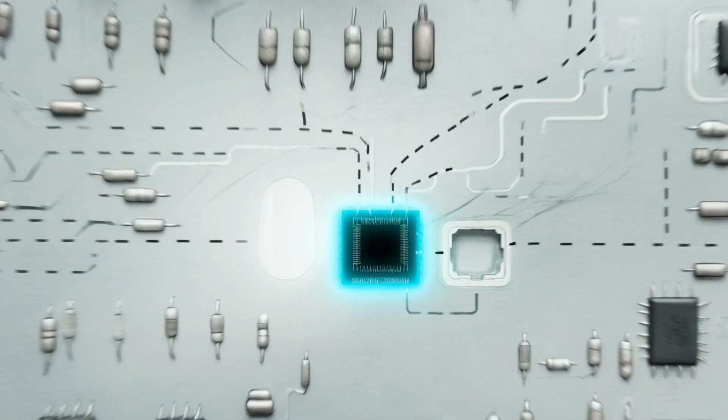Row upon row of gleaming steel and glass stretched toward the horizon, baking silently beneath the midday sun in vast parking lots across continents. Thousands of brand-new motorcars sat idle, their engines primed and ready, yet their intricate electronic systems lay paralyzed by the absence of a single sliver of silicon no larger than a fingernail.

This humble window control chip, or perhaps a more critical power management component, represented the fragile thread connecting modern mobility to the invisible world of semiconductors. The scene evoked a profound sense of vulnerability, a quiet reminder of how the pulse of global industry could falter when the microscopic heartbeat of technology skipped a beat.

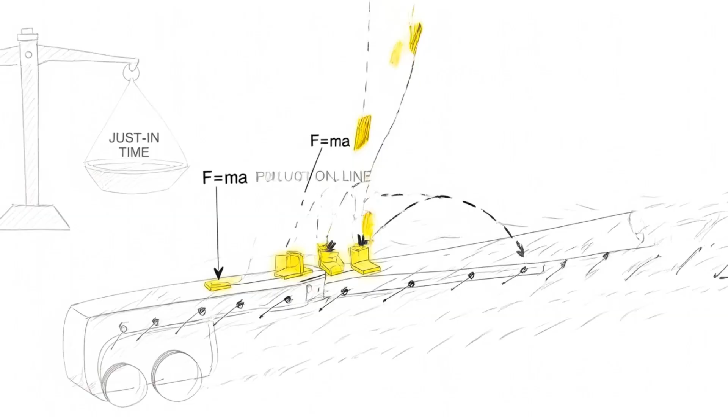For decades, the automotive sector had embraced the philosophy of just-in-time logistics, a delicate balancing act that minimized inventory costs but left no margin for disruption. When the global pandemic struck in early 2020, it triggered a cascade of events that shattered this fragile equilibrium.

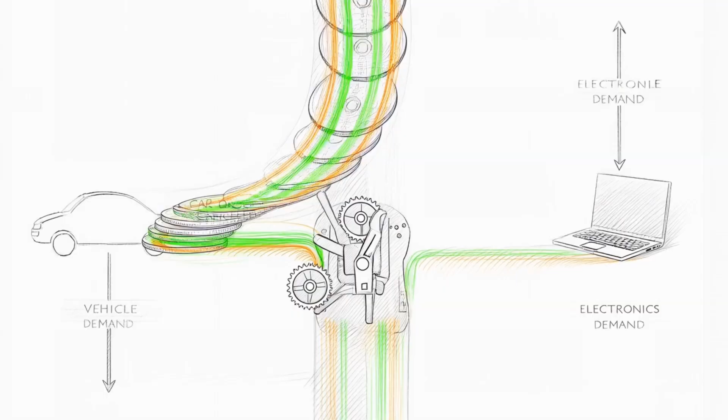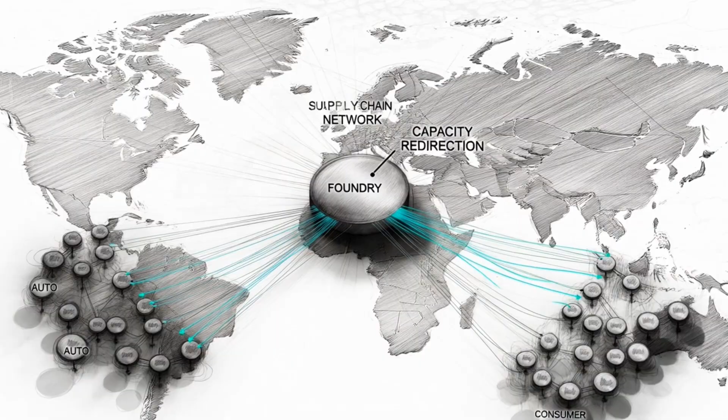Demand for vehicles plummeted initially, prompting manufacturers to cancel chip orders, only for consumer electronics like laptops and gaming consoles to surge as people shifted to remote work and entertainment. Foundries redirected capacity away from automotive needs, exposing a terrifying truth: the modern world had become tethered to an intricate supply chain it understood only superficially, one capable of halting production lines and inflating prices worldwide.

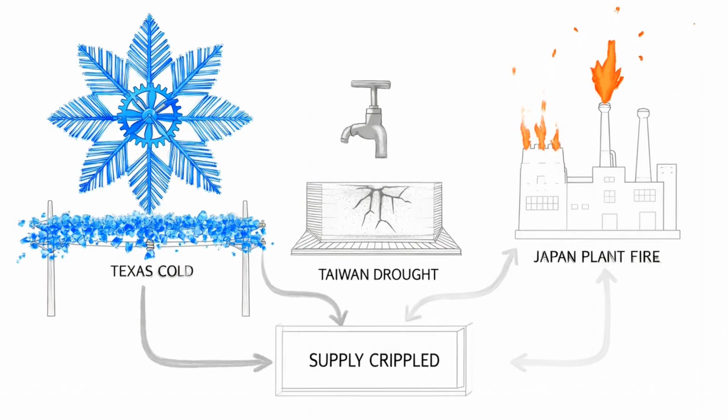The crisis extended far beyond a single event, amplified by additional shocks that tested the resilience of human ingenuity. Unseasonably cold weather in Texas disrupted energy supplies to fabs, a severe drought in Taiwan strained water resources essential for manufacturing, an earthquake and subsequent fire in Japan damaged key suppliers, and geopolitical tensions, including the conflict in Ukraine, interrupted the flow of specialized gases like neon critical for laser operations in chip production.

These factors converged into what industry leaders described as a perfect storm, resulting in over 11 million fewer vehicles produced globally between 2021 and 2023, with estimated revenue losses exceeding $210 billion for the automotive sector alone.

Factories idled, dealerships emptied, and consumers faced longer wait times and higher prices, yet amid this hardship emerged a deeper appreciation for the unsung heroes of progress, the engineers and scientists laboring in sterile environments to restore the flow of innovation. This period of scarcity highlighted not only fragility but also the potential for renewal, as governments worldwide responded with initiatives like the United States CHIPS Act, channeling billions into domestic manufacturing to build more robust supply chains and reduce dependence on concentrated production hubs.

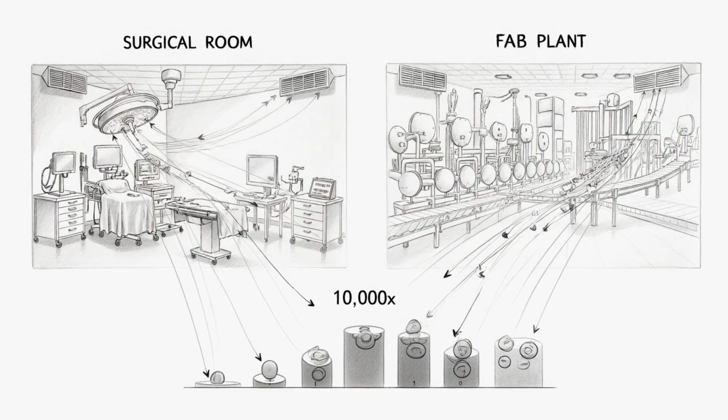Imagine stepping into a semiconductor fabrication plant, where the air undergoes filtration 10,000 times stricter than in a surgical operating room. A single rogue speck of dust could devastate an entire wafer, akin to a meteorite striking a bustling city. Here, in these cathedrals of precision, dedicated teams of engineers and technicians work in specialized suits, their movements deliberate and measured, surrounded by the low hum of machinery and the faint scent of purified chemicals.

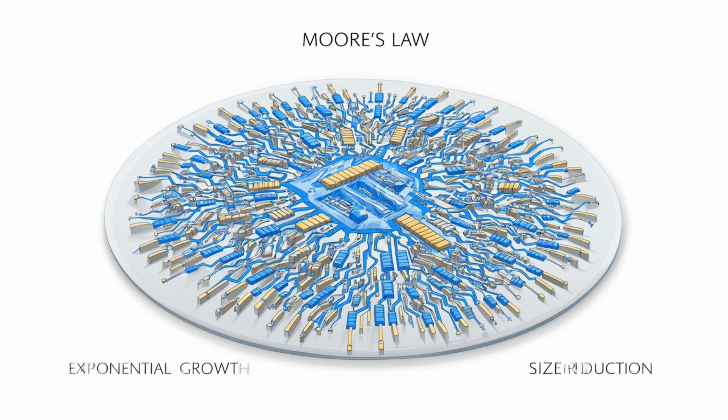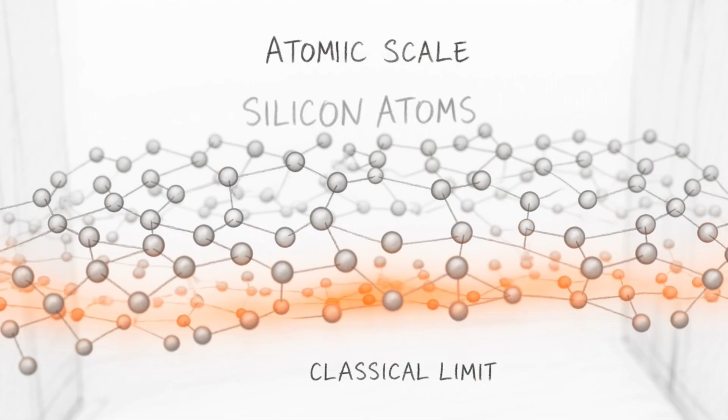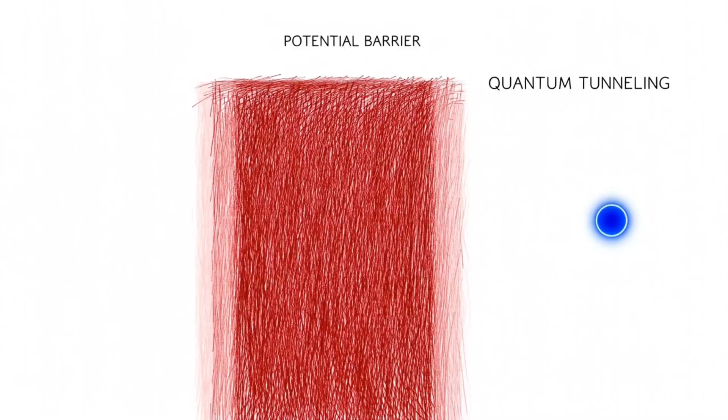They sculpt at the atomic level, employing invisible beams of extreme ultraviolet light to carve billions of microscopic structures into wafers derived from the purest sand, transformed through chemical processes into crystalline silicon. The rhythmic pursuit of progress, once guided by the observation that transistor counts could double roughly every 2 years with minimal cost increases, a principle articulated by Gordon Moore in 1965, now collides with formidable physical boundaries.

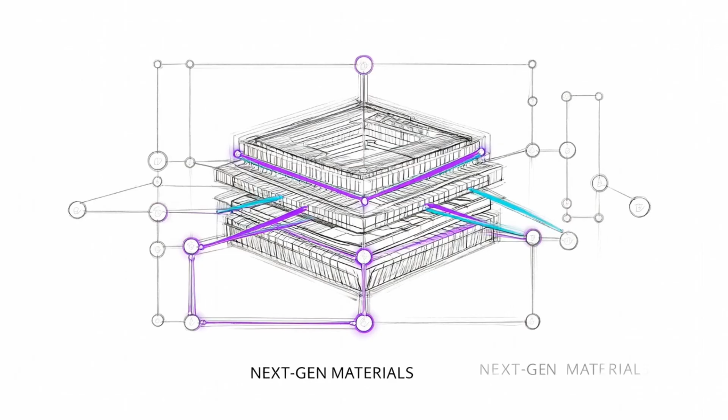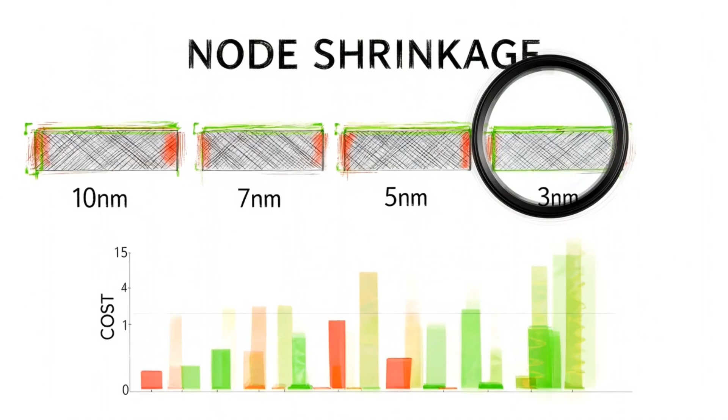Early transistors, invented in 1947 at Bell Laboratories by John Bardeen, Walter Brattain, and William Shockley, and later integrated circuits pioneered in the late 1950s, propelled humanity into an era of unprecedented connectivity, powering everything from smartphones that fit in a pocket to artificial intelligence systems reshaping industries and medicine. Yet as nodes shrank toward 3 nanometers and beyond, the expense of designing a cutting-edge chip escalated dramatically, often surpassing $600 million, triple that of prior generations.

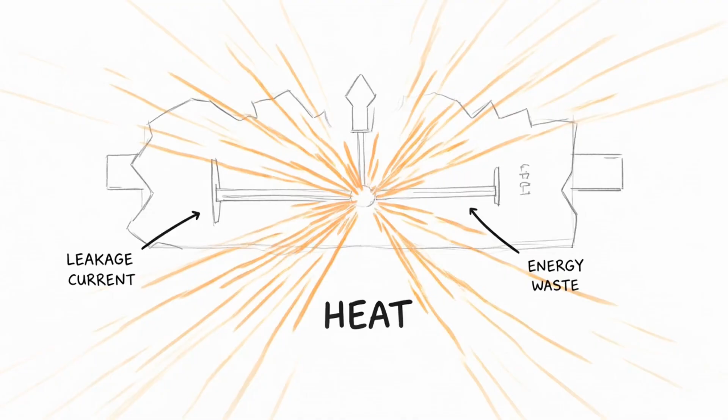At scales measuring mere atoms, classical physics yields to quantum phenomena, where electrons exhibit wave-like behavior, spontaneously tunneling through barriers that should contain them, leading to unwanted leakage currents that waste power as heat. To confront this challenge, the industry developed the gate-all-around field effect transistor architecture, a breakthrough that envelops the silicon channel completely on all 4 sides.

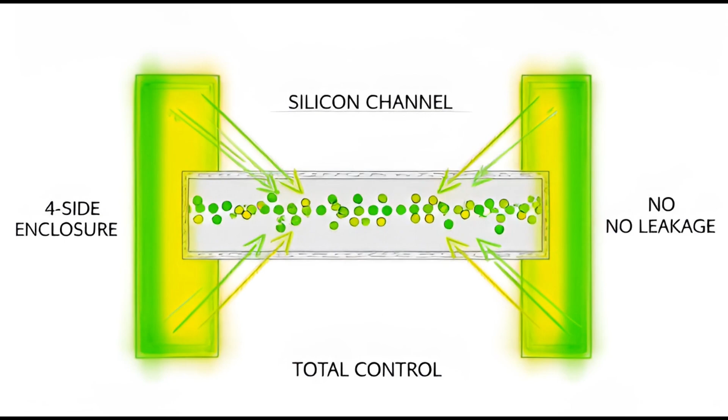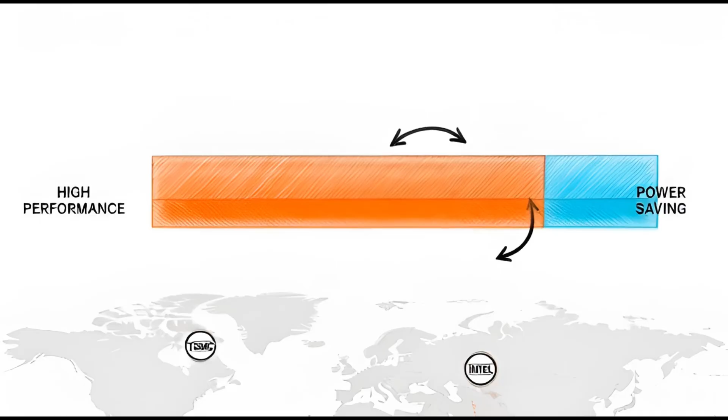Creating a microscopic enclosure that exerts superior electrostatic control and prevents electrons from escaping. This innovation, first commercialized by Samsung at the 3nm node through its multibridge channel field effect transistor variant, allows for stacked nanosheets that can be tuned in width to balance performance and efficiency. Competitors like Taiwan Semiconductor Manufacturing Company and Intel followed suit, with the latter integrating it into its 18A process alongside other advances.

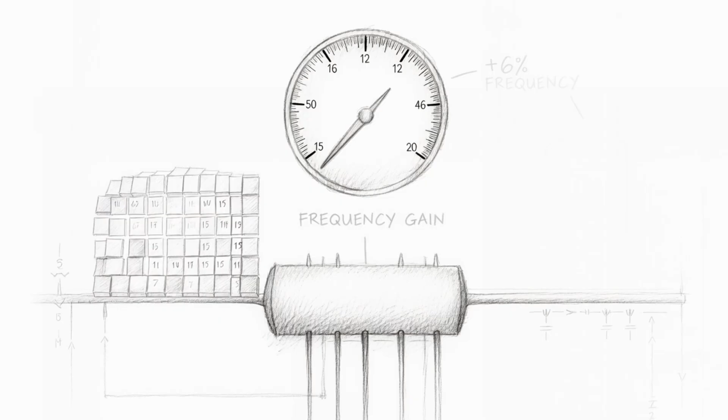Complementing this is the innovative backside power delivery approach, pioneered by Intel under the name PowerVia, which relocates the power network to the underside of the wafer. By separating power lines from the signal pathways above, engineers eliminate interference, reduce voltage drops, and achieve gains of approximately 6% in frequency alongside 5 to 10% improvements in cell density and overall power efficiency.

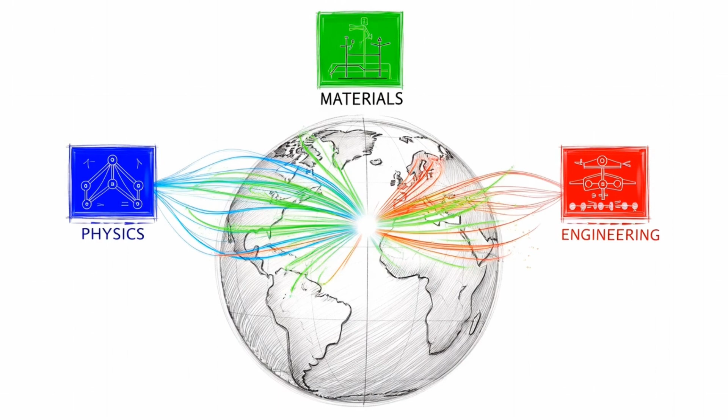These techniques represent more than technical feats, they embody the human spirit of perseverance, where teams of physicists, materials scientists, and process engineers collaborate across time zones and cultures to push the frontiers of possibility, transforming potential defeat into elegant solutions that sustain the march of computation.

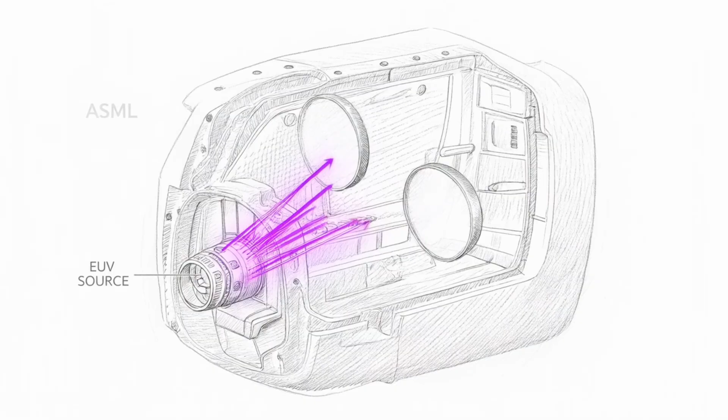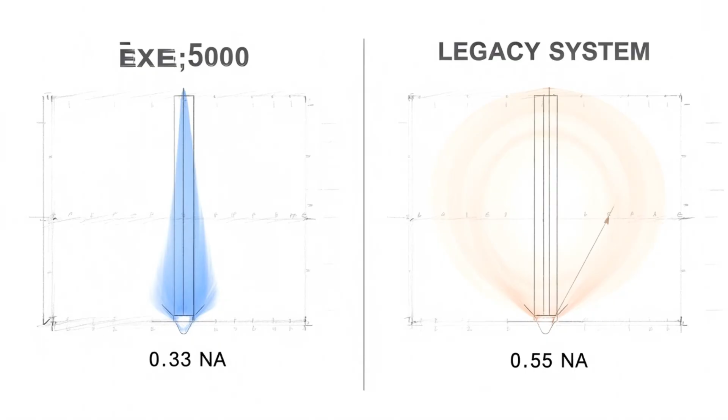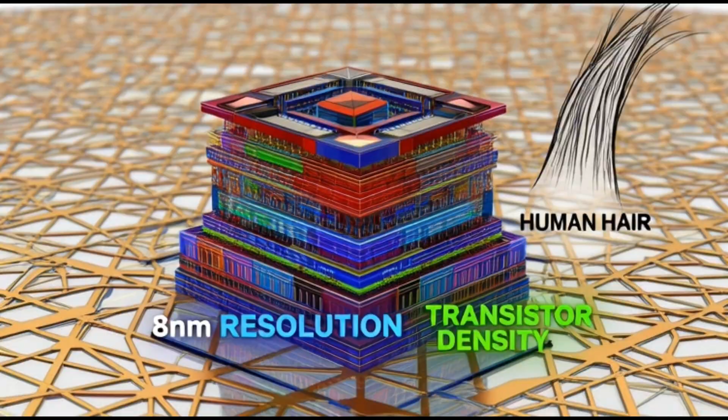Central to these advancements stands a singular company in the Netherlands, ASML, whose high numerical aperture extreme ultraviolet lithography machines have become indispensable. The TWINSCAN EXE:5000 and its successors, such as the EXE:5200B, operate with a numerical aperture increased to 0.55 from the previous 0.33, enabling single exposure features as fine as 8 nanometers and boosting transistor density by nearly 2.9 times.

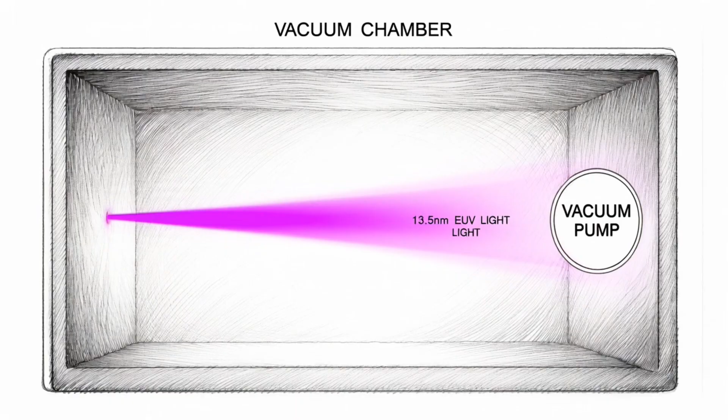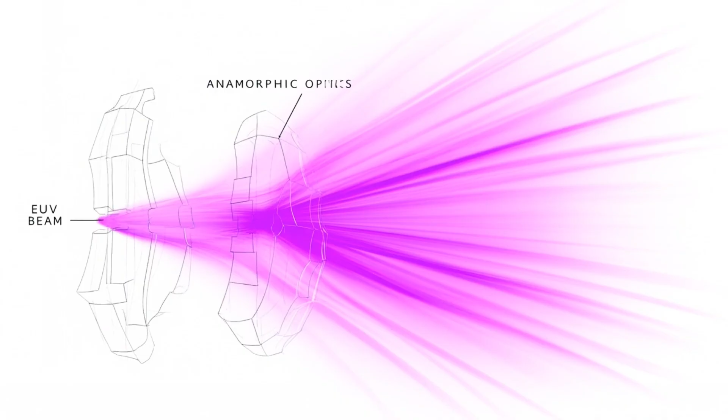These systems demand an environment of flawless vacuum because extreme ultraviolet light at 13.5 nanometers wavelength is absorbed by air itself, and their mirrors, polished to atomic smoothness that, if scaled to the size of the Earth, the tallest mountain would rise by less than 1 millimeter, reflect and focus the delicate beams with extraordinary precision. The anamorphic optics introduce a distortion that halves the effective printable field size from approximately 858 square millimeters to around 429 square millimeters. Yet this trade-off unlocks unprecedented scaling for the most advanced logic and memory chips.

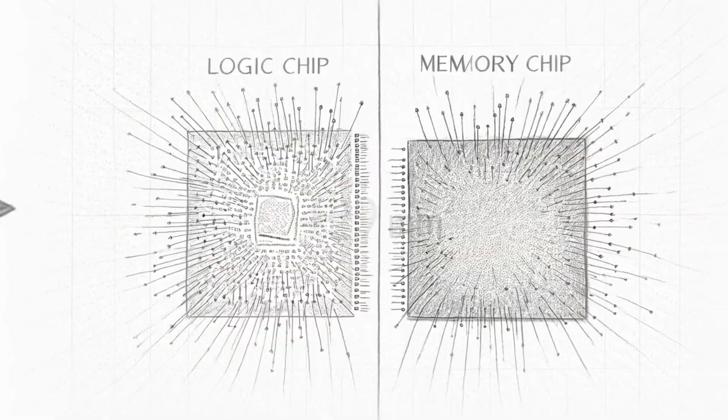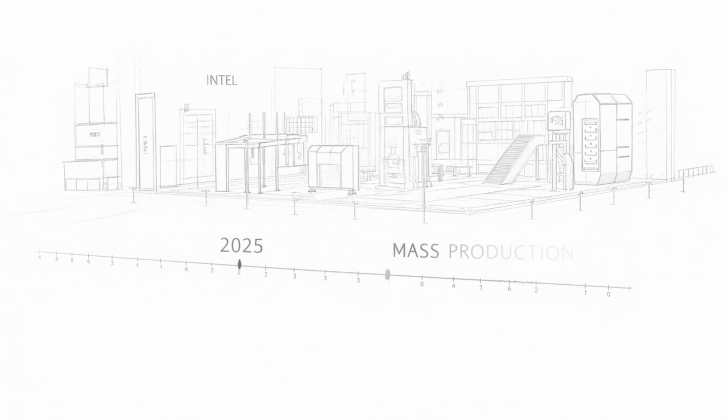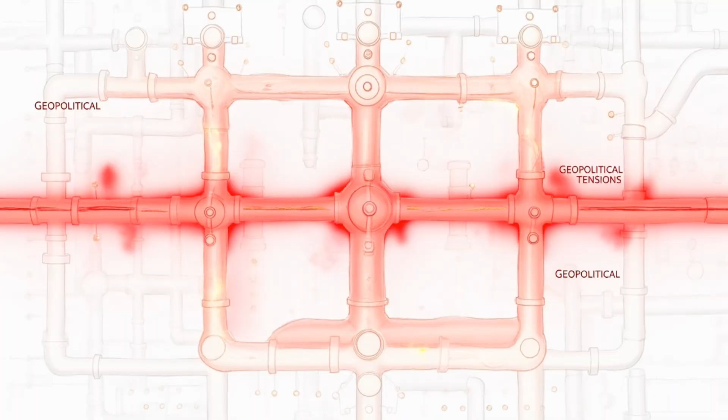Intel became the first to install a commercial high numerical aperture tool in its facilities, with high-volume manufacturing anticipated in 2025 and 2026, followed closely by Samsung and others. This technological monopoly underscores both vulnerability and excellence, as global supply chains navigate export controls and strategic investments to ensure continued access amid rising geopolitical tensions, particularly around key production centers like Taiwan, which fabricates over 90% of the world's most advanced semiconductors.

As monolithic designs strain against the physical reticle limit, the maximum area a single exposure can reliably pattern without prohibitive defect rates, engineers have embraced the era of chiplets. Rather than crafting one enormous die prone to yield losses, they assemble smaller, specialized modules like building blocks in a precise game of microscopic construction.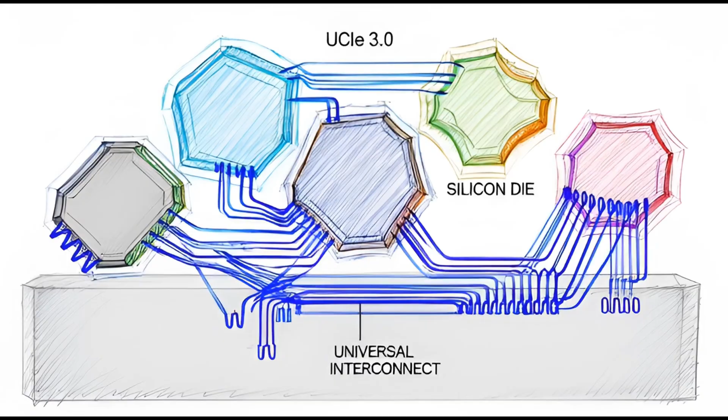The Universal Chiplet Interconnect Express standard, now advanced to version 3.0 as of 2025, serves as the universal language enabling seamless communication between these dies. It delivers bandwidth densities reaching terabytes per second per square millimeter, with data rates up to 64 gigatransfers per second, latencies under 2 nanoseconds, and power consumption around half a picojoule per bit, 20 times more efficient than traditional peripheral component interconnect express lanes.

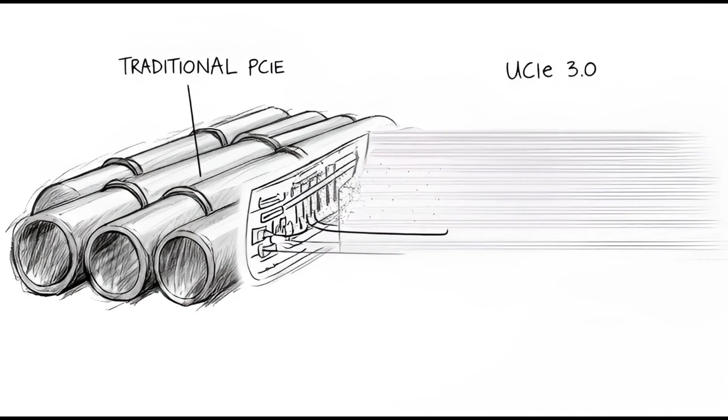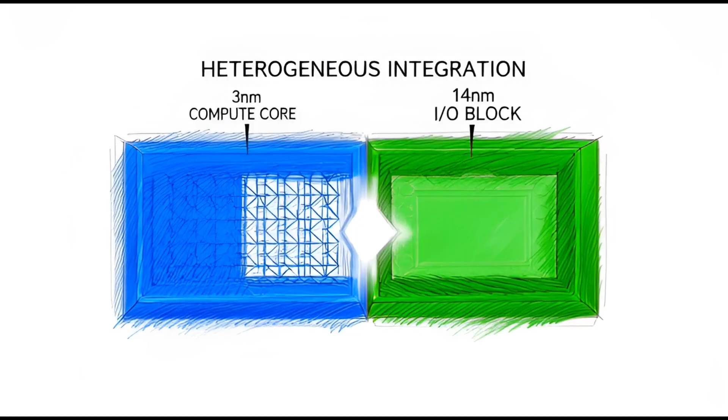This modular approach allows pairing high-performance 3nm computational cores with cost-effective input-output blocks on 14nm processes, dramatically improving manufacturing yields and economic viability while supporting complex systems like those powering artificial intelligence accelerators from companies such as NVIDIA. The shift to chiplets not only circumvents physical constraints but also fosters collaboration across the industry, with over 120 technology leaders contributing to the open standard, promoting innovation and resilience in the face of escalating demand from artificial intelligence, data centers, and autonomous systems.

Simultaneously, silicon reaches its limits in high-power and high-frequency domains, paving the way for wide bandgap materials such as silicon carbide and gallium nitride. Silicon possesses a bandgap of 1.12 electron volts, which falters under intense electrical stress, but silicon carbide, with a bandgap around 3.2 electron volts and superior thermal conductivity of 5 watts per centimeter Kelvin, thrives in environments exceeding 300 degrees Celsius.

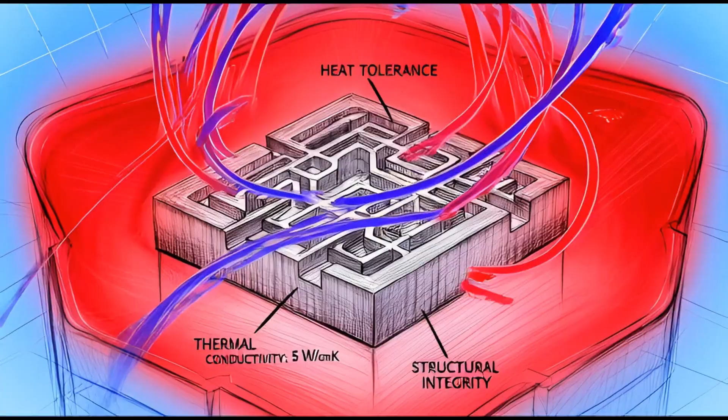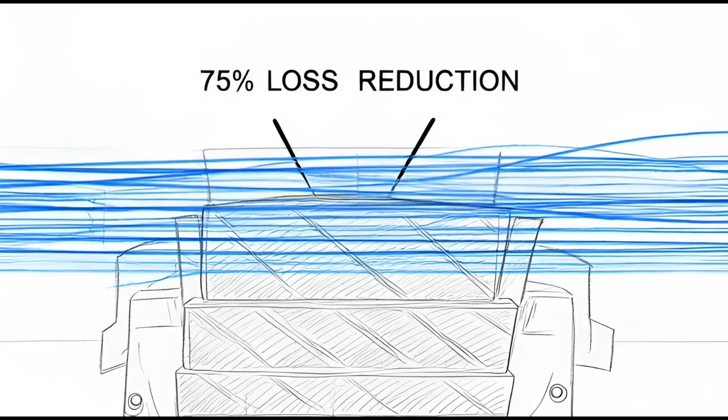In electric vehicles, it enables 800-volt architectures that slash energy losses by up to 75%, support rapid charging times often under 20 minutes, and reduce the need for bulky cooling systems, thereby extending driving range and enhancing overall efficiency.

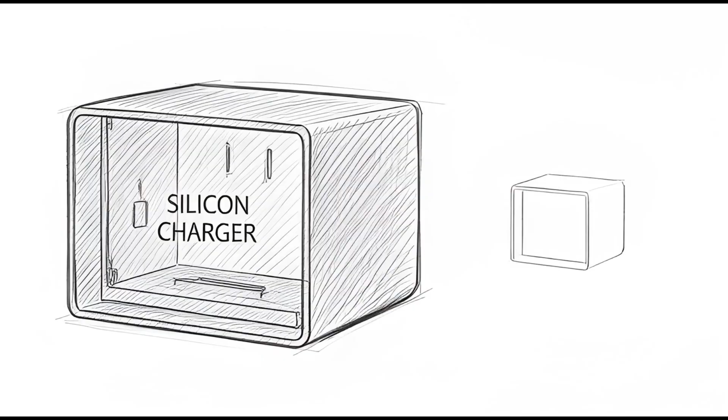Gallium nitride, boasting a band gap of 3.4 electron volts and exceptional switching speeds, powers compact chargers that occupy 1/3 the volume of silicon equivalents while maintaining high efficiency. And it underpins the radio frequency amplifiers essential for 5th generation and emerging 6th generation networks, as well as data centers where space and energy constraints grow ever tighter.

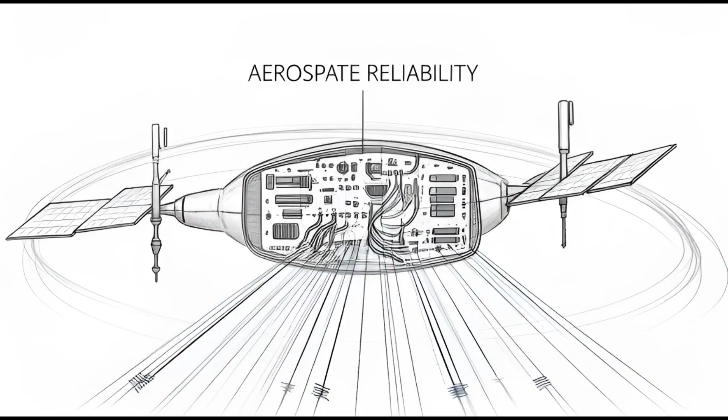These materials open new frontiers in aerospace, renewable energy, and industrial applications, where reliability under extreme conditions is paramount. Their adoption promises substantial environmental benefits by lowering global energy consumption in power electronics, aligning with broader sustainability goals as the world transitions toward electrification and smarter infrastructure.

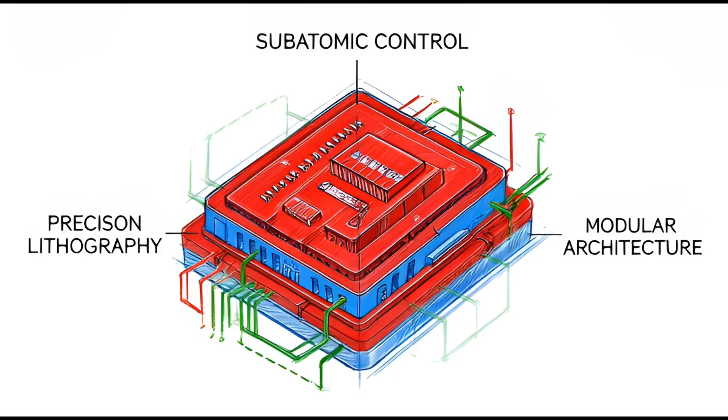The convergence of these breakthroughs, subatomic transistor control, innovative power routing, precision lithography, modular architectures, and advanced materials, illustrates a profound evolution rather than an end to the principles of exponential progress first noted decades ago.

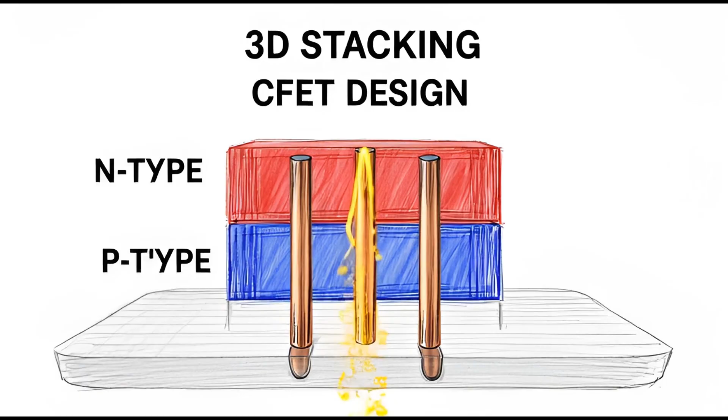Scientists and engineers worldwide, drawing from quantum mechanics insights and collaborative research shared through academic papers and reputable platforms, propose that future gains will arise from three-dimensional stacking, complementary field effect transistor designs that layer N-type and P-type devices vertically, and hybrid integrations with emerging technologies like two-dimensional materials or even optical interconnects.

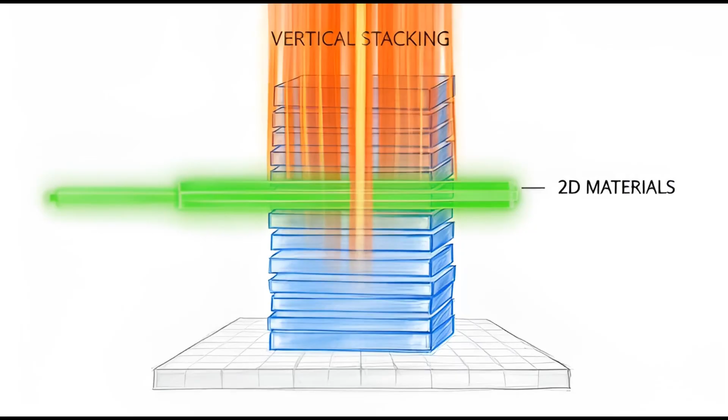Theories discussed in leading forums emphasize holistic system-level optimization, where software and hardware co-design, advanced packaging, and artificial intelligence-driven layout tools extend capabilities beyond pure dimensional scaling. This era marks not a retreat but a renaissance of creativity, where humanity architects around the laws of physics, turning potential barriers into pathways for greater efficiency, accessibility, and innovation that benefits communities everywhere.

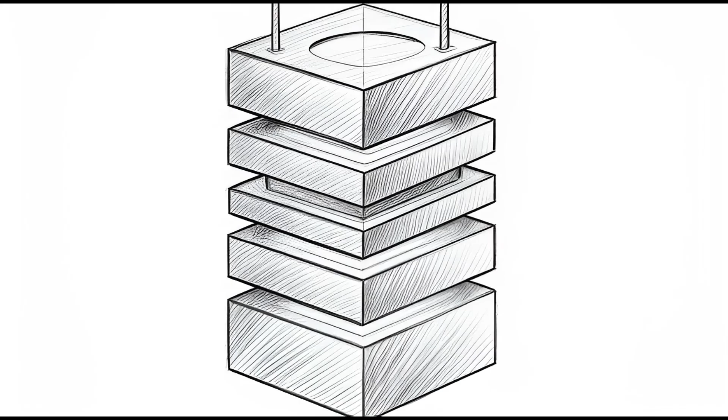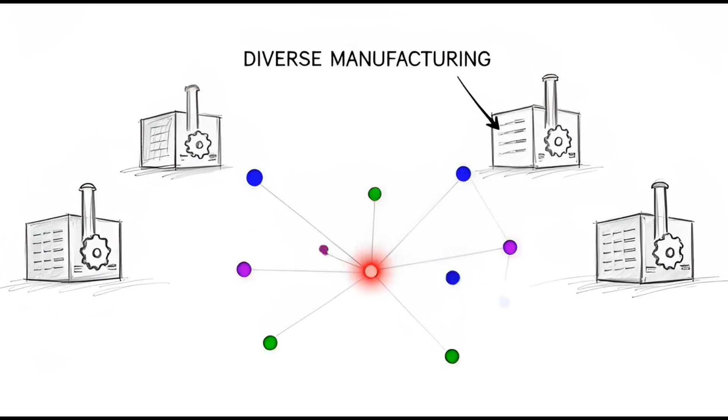In practical terms, when facing situations akin to supply disruptions or technology bottlenecks, one can respond effectively by prioritizing the maintenance and upgrading of essential devices with components known for durability, such as those incorporating wide bandgap efficiencies for longer battery life and reduced heat. Support policies that diversify manufacturing locations to enhance global resilience, pursue education in science, technology, engineering, and mathematics fields to contribute to the workforce, and choose products from manufacturers investing in sustainable practices.

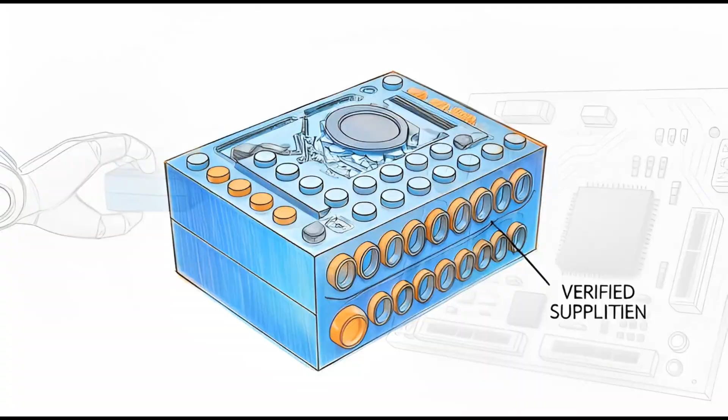For instance, in an emergency where a critical electronic system fails due to component scarcity, inspect for software updates that optimize existing hardware, source compatible replacements from verified suppliers emphasizing modularity, and advocate for community-level preparedness through diversified sourcing. These steps empower individuals and organizations to navigate uncertainties with confidence, fostering a culture of proactive stewardship over technological dependence.

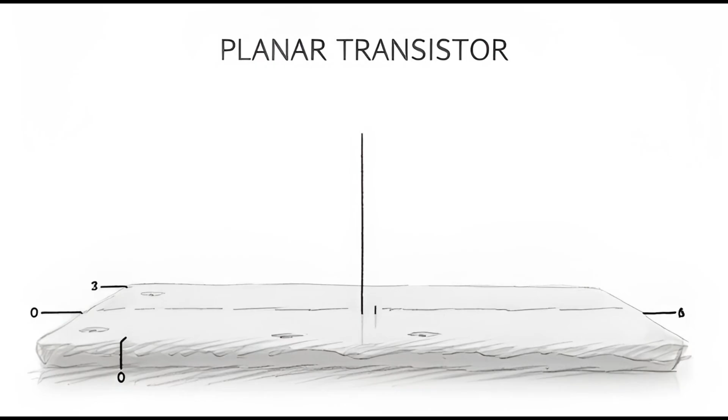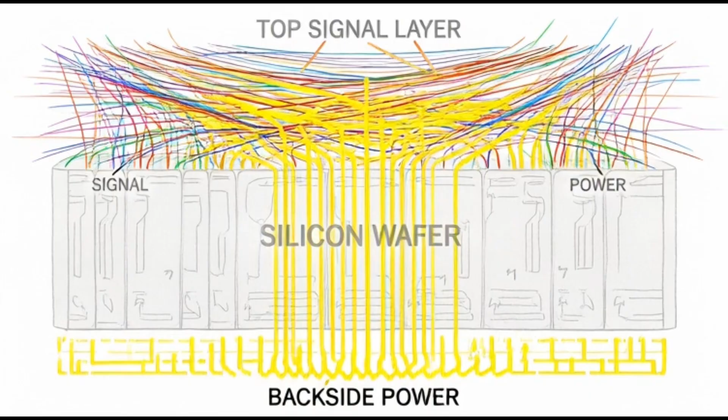Delving deeper into the science, the transition from traditional planar transistors to three-dimensional gate-all-around structures addresses short-channel effects by providing complete gate encirclement, minimizing leakage to fractions of previous levels and enabling operation at lower voltages for power savings. Backside power networks further mitigate resistive losses, achieving up to 30% reduction in voltage drop in some analyses, while high numerical aperture systems discard multi-patterning complexities for cleaner, faster production.

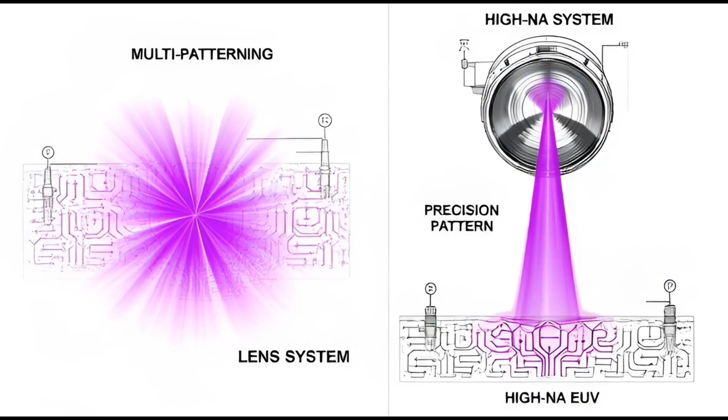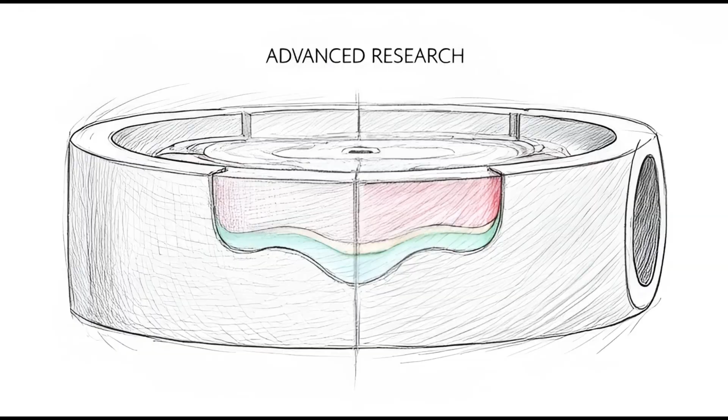Wide bandgap semiconductors operate reliably in harsh thermal and electrical regimes due to their larger energy gaps, which require more energy for electron excitation, resulting in lower intrinsic carrier concentrations and superior performance. These advancements, grounded in rigorous experimentation at facilities worldwide, ensure continued progress while promoting energy conservation that benefits the planet and future generations.

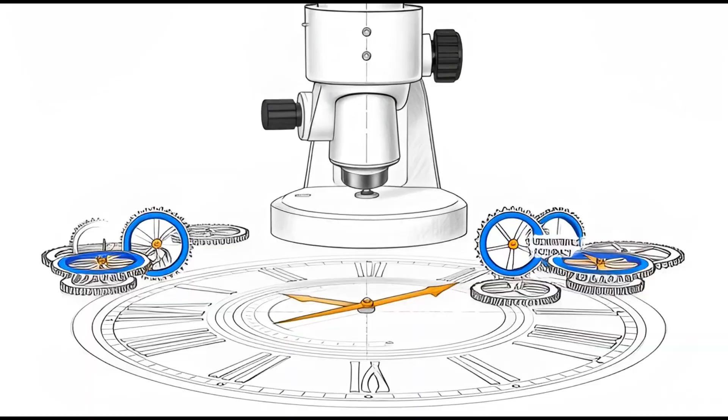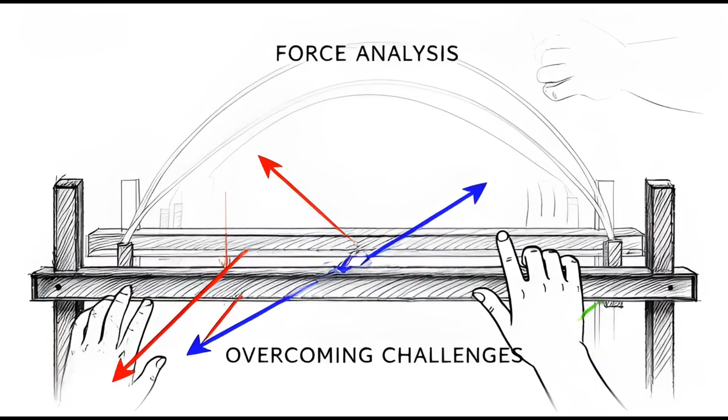Through these explorations, we uncover not only technical wonders but also the inspiring resilience of human collaboration in overcoming challenges.

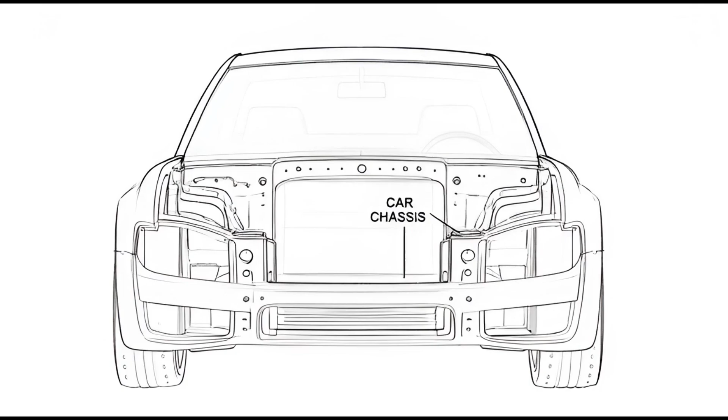Consider this situation: your new vehicle purchase is delayed indefinitely due to component shortages. What steps would you take to adapt? Would you choose option A, relying on a single advanced monolithic processor for maximum performance despite risks, or option B, embracing modular chiplet designs for greater reliability and flexibility?